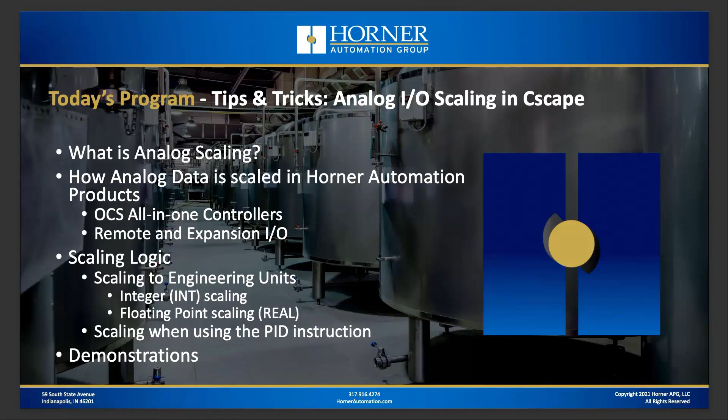Okay, so let's start with what is analog I/O? Well, I think most people understand, maybe new folks are just getting used to the fact that analog I/O are sensors and actuators whose real-world operation is more than just on or off. In other words, they're providing values, data values, typically integers, that are used in either the monitoring of a process or the control of a process, okay?

So an example, for instance, of a digital input might be a temperature or a thermal overload switch. Now that's just going to be on or off based on a thermal overload condition. However, a thermocouple sensor, which is a type of analog sensor, it won't just give you on or off, it'll give you the value of the temperature, for instance.

Another example on the output side, because remember, analog isn't all about inputs, there's also analog outputs. An example of a digital output might be a solenoid valve, which is just on or off, okay? But the analog corollary to a valve might be a proportional valve, all right? An analog proportional valve, where you're not just controlling on or off, but let's say 60% off or 70% off, that sort of thing, okay?

Now, to make analog I/O integrate properly with your control, you need to perform analog scaling. So that's really the conversion of analog to digital data and digital to analog data to and from sensors and actuators and engineering units. So that's really what the program's all about today.

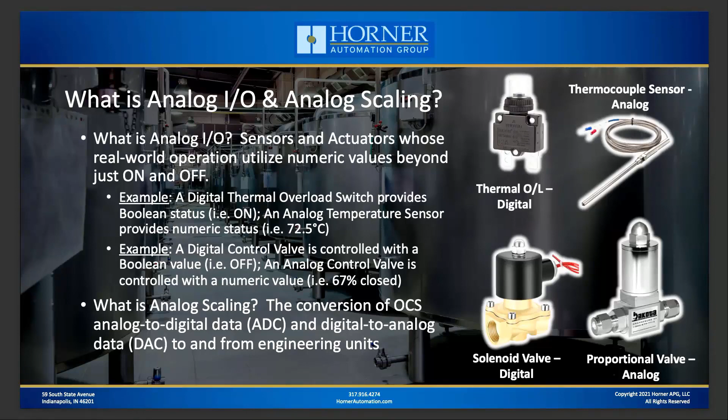Now, from my perspective, there's really three keys to successful analog scaling. First, understand how the sensor converts its measurement to an output signal. What are the engineering units that it's measuring? Are we talking about pressure? Are we talking about temperature, etc.? And then what's the output signal look like? Is it 4 to 20 milliamps? Is it 0 to 10 volts? What does it look like?

Now the third key to success is understanding how to configure and program the controller to interpret that numeric value that was converted from the signal into a measurement in engineering units. So again, the three keys are understand the sensor, understand how that signal from the sensor is converted to an integer value in the I/O module, and then understanding how to program and configure the controller to interpret that signal and convert it to engineering units. So those are really the three keys to success.

And we're going to spend quite a bit of time really on, I think, the last two, all right? Because those are the ways that might be different with a Horner product than what you might be used to with another control product. So we're going to spend a lot of time on the conversion of the signal on the I/O side, and then also on the programming to get you the engineering units that you're looking for, properly scaled, of course.

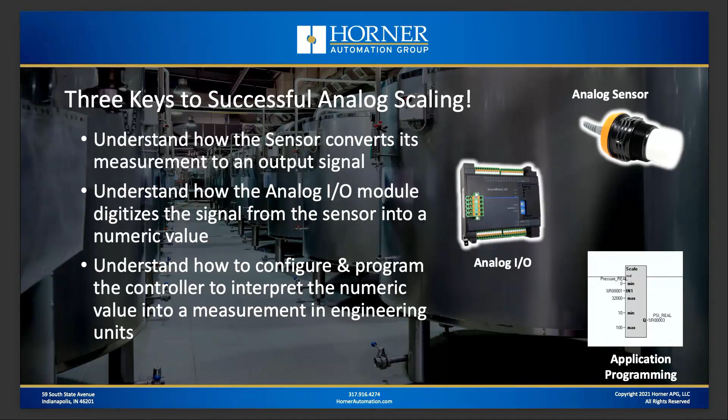Okay, so of course, analog inputs are typically going to be from sensors, and most sensors are going to convert a real-world measurement into a linear electrical signal. Okay, 4 to 20 milliamps is the most common, but you'll also see 0 to 20 milliamps, 0 to 10 volts, 0 to 5 volts, and several others, okay?

Now, what the OCS analog inputs will do, and again, whether this is a separate I/O module or built into the back of an OCS, what that circuitry does is it converts that signal, let's say 4 to 20 milliamps, for instance, into a numeric value, and that numeric value is reported in an AI register. The AI registers are the type of analog input registers which accept analog input values.

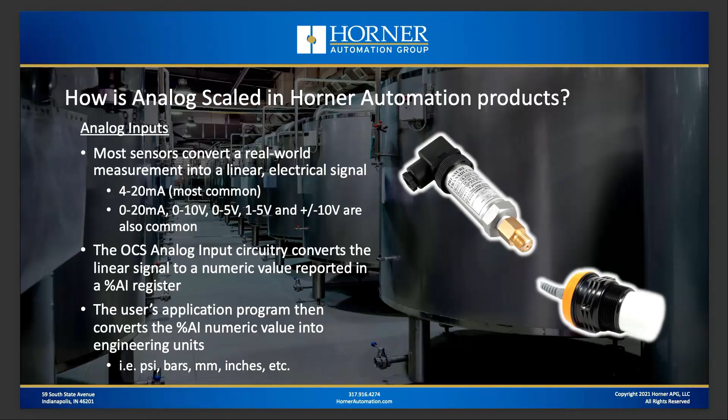And then the last step, of course, in the user's application program, you need to write some logic to convert that analog input numeric value into the engineering units you're looking for, PSI, bars, millimeters, inches, etc. Okay, so that's really what we're talking about, of course.

Now, temperatures are a little bit different. The reason they're a little bit different is because sometimes the circuitry that converts the sensor into temperature is built right into the I/O.

Now, RTD and thermocouple temperature sensors, again, because they're so common, there's two ways you can handle those, okay? First of all, you can connect that sensor to a separate transmitter, which is a separate piece of hardware, which converts that signal from the temperature sensor into a 4 to 20 milliamp signal, for instance, and then that 4 to 20 milliamp signal then gets sent to the OCS as a regular analog signal. So that's one way to handle it.

And then the other way that you can handle it is by utilizing one of the specialized analog input circuits in, say, the Model 5 or the Model 6 OCS, or one of our thermocouple or RTD input modules, where they actually have the circuitry to interface directly with the sensor and convert to temperature. But the value that's converted might need some simple math to get it into degrees Fahrenheit or degrees Celsius, to make it an integer, to make it a floating point value, whatever you're looking for in your application. So again, temperature sensors can be a little bit different.

Now on the analog output side, because remember, we're not only talking about inputs, analog outputs just work in the opposite way. Okay, it starts from the user's application program, where the program determines how the analog actuator needs to operate. For instance, I may want to decide to close the valve 60%. That may be what I want to do in this machine step for machine control.

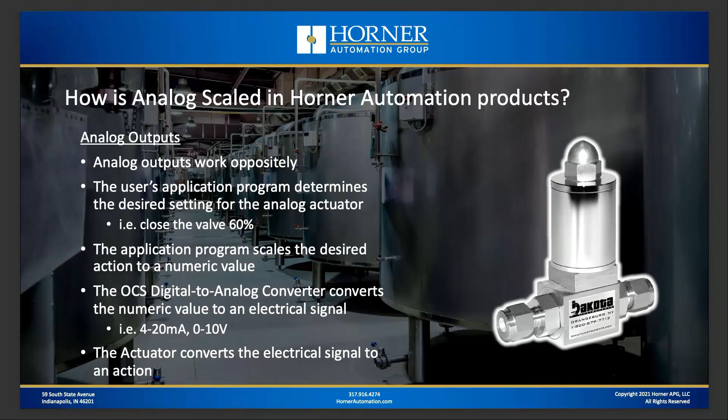All right, now I'm going to show several slides here with a lot of detail on them, and I'm not going to spend a ton of time on these slides. I know a lot of people use these videos kind of to reference after the fact. So when you're in that scenario, of course, you can always scrub right up to the slide you're interested in, pause it there, and soak it in if you want.

But really what we're talking about here is, what does the scaling look like from the analog signal that's generated by the sensor into the analog input value, or the integer value that is present in the %AI register, okay? So most general purpose sensors out there are going to be putting out either 4 to 20 milliamps or 0 to 10 volts. And then on the OCS conversion of 4 to 20 milliamps, for instance, 32,000 counts, or an integer value of 32,000, is going to be full scale. So that's going to be 20 milliamps. 0 is going to be minimum scale, or 4 milliamps.

Now, if it happens to be that your sensor is a little bit under range, in other words, it's putting out a signal below 4 milliamps but above 0, you'll see that in the form of a negative value. Okay, and if your sensor happens to be a little bit over range, it's also possible you'll see a value a little bit bigger than 32,000. And with voltage, it's very much the same. Full scale of 10 volts is 32,000. Minimum of 0 volts is 0 counts. Okay, and you may get a little bit of over range as well. So that's the basics of how, in most cases, analog data is scaled on the input side with the OCS and the OCS I/O.

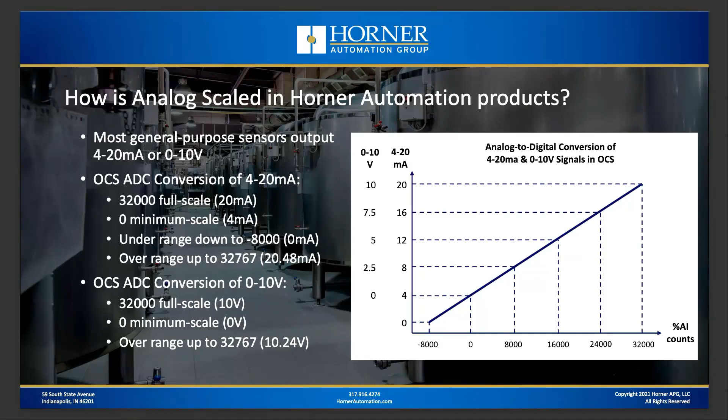Now let's talk a little bit about resolution, because I know some people get confused. They'll say, now wait a minute, this XLE product I have here has 12-bit resolution, while the Model 6, I think, has like 15 or 16-bit resolution. How can the scaling be the same? That doesn't make any sense.

Well, in reality, it is the same, because the only thing that the resolution of the reading affects is how many numbers increment or decrement as the signal changes. For example, if you're using an analog input from Horner that has 16-bit resolution, the minimum change is 1 count. So as that signal is very slowly incrementing, you can potentially watch that analog value in the AI register incrementing all the way up 1 at a time.

However, if you're dealing with a Horner product with 12-bit resolution, it's still going to be creeping up from 0 to 32,000, but it's going to be creeping up 8 counts at a time, because the minimum resolution from a counts standpoint is 8 counts. Okay, so your scaling is always 0 to 32,000. It's just that the steps that you take between 0 and 32,000 will change based on your resolution.

And I will make one caveat here that we'll point out again in the program, and that is that SmartRail actually is the only Horner product we have that isn't scaled 0 to 32,000. It's scaled 0 to 4,000. So that is an outlier there.

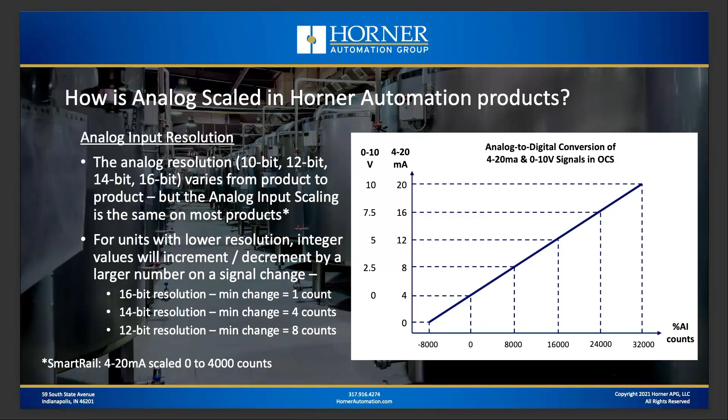Okay, here's a chart. Again, I'm not going to spend a lot of time on this, but it basically shows you the scaling and the resolution of some popular Horner automation products, from the Micro OCS, which is our most cost-effective product line in that first column there, followed by a couple of our most popular XL Series I/O options, the Model 3 and the Model 6, followed again by the SmartRail and the SmartBlock. And the SmartBlock is really our premium analog product.

So if you have an application which requires really the highest resolution and the highest isolation and those sorts of things from an analog perspective, the SmartBlock is really our premium product. Now, that being said, we have excellent analog throughout our range, and your requirements may very well be met even by the Micro OCS product, for instance.

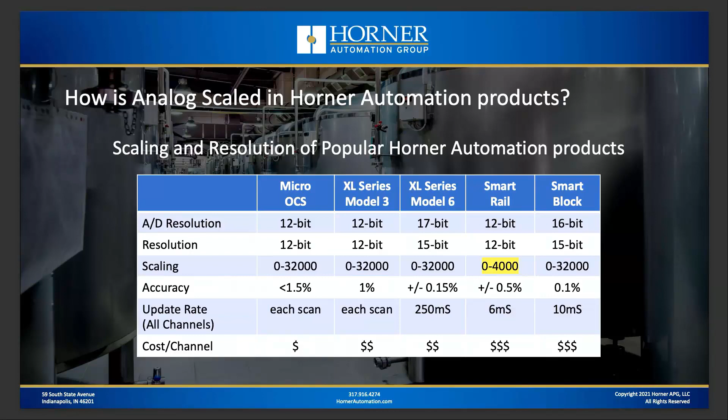Okay, now let's take a look at an example. Let's say we have a pressure sensor that's connected into one of our OCS products. And let's say the pressure sensor is monitoring pressure in a range of 0 to 10 bars with a resolution of 0.01 bars. Sometimes with an analog sensor, you'll get a resolution specification, other times you won't. It just depends on the sensor.

And then the output of that sensor, again, the input is in pressure or bars, the output is 4 to 20 milliamps. Now, from an OCS conversion standpoint, as we've already covered, 32,000 counts is going to be 20 milliamps or 10 bars. 4 milliamps is going to be 0 counts or 0 bars. And then you can see a linearization equation there on the screen. How would we convert from counts to bars? Although I'll show you an easier way to do it when we get to the programming side of things.

And then if we go through the math with a sample reading of 13,520, we do the math and we see that the end result is 4.23 bars. Okay, so that's an example of getting from a pressure sensor into a pressure reading inside your application program.

The second example is the same case, but this time with SmartRail. So really the only difference is that instead of 32,000 counts being full scale, it's going to be 4,000 counts being full scale. Everything else is the same. Of course, our linearization equation is slightly different because our full scale is different.

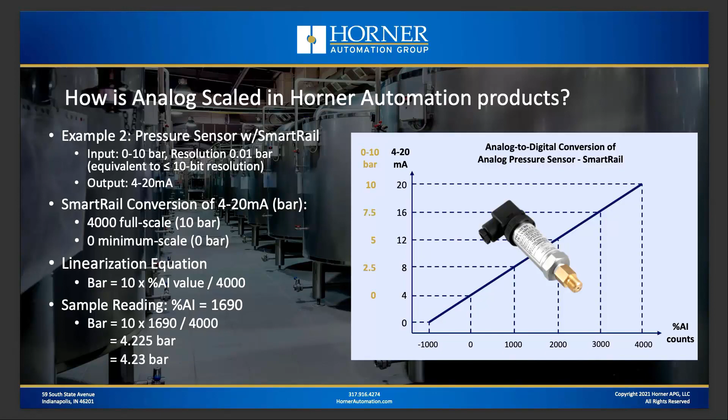But the end result, if we have the same pressure reading on the pressure sensor, the end result is the same. So if we have 4.23 bars being read by the analog sensor, we're going to end up with 4.23 bars in the application program. So again, regardless of the scaling value or the max value, you're going to end up in the same place from an engineering unit standpoint.

All right, now let's take a look at an ultrasonic level sensor. A little different scenario. Now we're not looking at pressure, we're looking at an ultrasonic level sensor, which has a range of 1 to 25 feet. So pretty long distances, relatively speaking, for ultrasonics. 32,000 counts is going to correlate to high range, which is 25 feet. 0 counts is going to correlate to low range, which is 1 foot. Our equation is similar but slightly different, as you can see there.

If we have a sample reading of 7228 in our AI register, where do we end up? Well, we end up at 6.42 feet. And if we're interested in inches instead, we can be looking at 77.1. So again, these are just different examples of scaling that's done on sensors with different ranges into OCSs and OCS I/O modules.

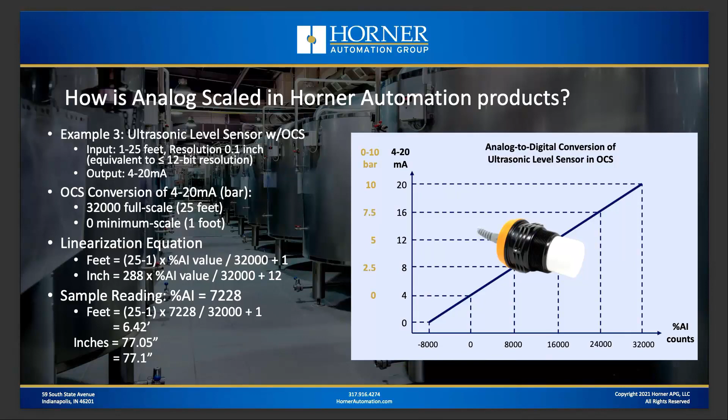Okay, now let's look at one the other direction. Now we're talking about a proportional valve, where the input to the valve is the signal. So the input to the valve is the signal, 4 to 20 milliamps in this case. The output of the valve is the position of the valve from 0 to 100% open, for instance. So let's say that with this particular valve, and it could vary by valve, the 0 counts is 0% open and 32,000 counts is 100% open.

And it could be the opposite. It could be 0% closed and 100% closed. It all depends on the valve. You'd want to check your documentation for your valve to be sure. But in this scenario I've outlined here, we've got a pretty straightforward linearization equation.

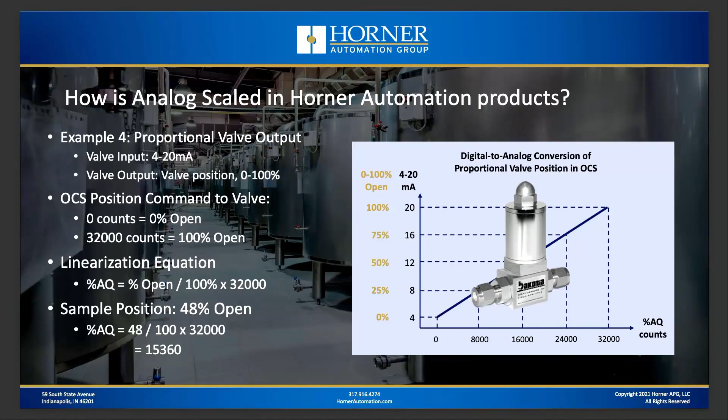And if we want to move the valve to 48% open, we can do the quick math and we can see that we need to set our AQ register. Remember, AIs are where analog inputs come in. AQs are where analog outputs go out. So our AQ register would need to have a value of 15,360 in my example here, if we want that valve to be 48% open.

Okay, we're going to talk about temperature sensors now because they're a little bit different. And this is an area I do see customers get tripped up a little bit, because we're doing the actual temperature conversion in the OCS most of the time. And when we are, the units that we provide, even though they're already converted to temperature, may not be in the exact units that customers are looking for, whole degrees or tenth degrees Fahrenheit or Celsius.

Now, remember, there's still two approaches we can take. If you've got an OCS that only has 4 to 20 milliamp or 0 to 10 volt inputs, for instance, you could use an external temperature transmitter that's going to do the temperature translation for you and output that linear signal. But if you want to connect those sensors directly into one of the Horner OCS's temperature type inputs, thermocouple or RTD, we also actually do more than that. We also do thermistor as well on some products.

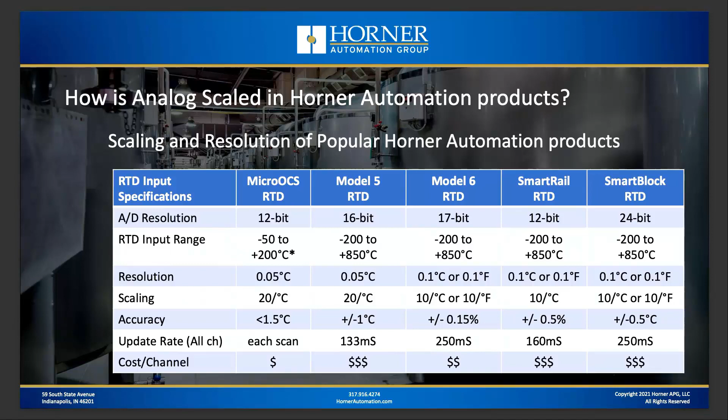So you can see some differences there in terms of the resolution, how the temperature is scaled, what the accuracies are, how frequently the channels are updated, all those sorts of things. I'm not going to go through those in great detail, but I want to show you there is a great variation there. All the way over to the right, the A to D converter used on the Smart Block is quite high in resolution, even though at the end of the day, you're still looking at tenth degree C or tenth degree F in terms of your actual readings.

Okay, that last chart was all about RTDs. This chart is about thermocouples. Thermocouples are just slightly different variations of temperature sensors. They work completely differently, but they are often used in industry, just like RTDs are, and they're not supported directly in the micro OCS line. So if you're using a thermocouple with a micro OCS application, you will need to use an external temperature transmitter to convert over to 4 to 20 milliamps and linearize externally. But again, lots of variation in terms of the specifications for thermocouples in the Horner OCS product line, and the I/O that's accepted as well.

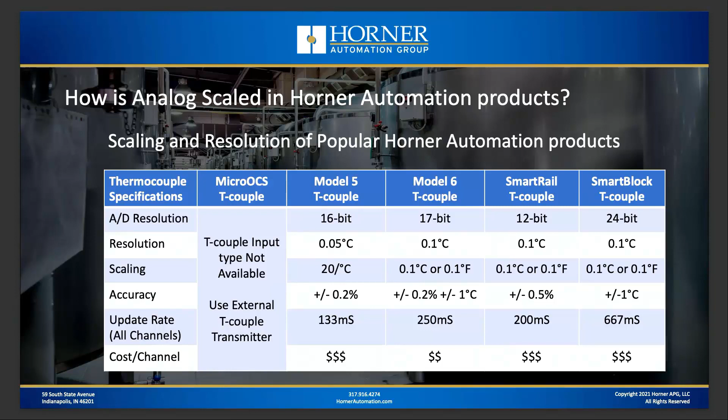Now let's do a quick example of an RTD input connected directly to, let's say, the XL Series Model 6 I/O. That's one of our most popular XL Series I/O options because it has 6 analog inputs and 4 analog outputs, and each of the 6 analog inputs can be configured for thermocouple, RTD, 4 to 20 milliamps, 0 to 10 volt, and even more. So really flexible on the input side of things there.

Okay, so let's say we have a PT100 sensor, platinum 100 ohm sensor, connected into a Model 6 or maybe into the Smart Rail. One AI count, in the case of the temperature readings, is going to correlate to either a tenth of a degree Celsius or a tenth of a degree Fahrenheit, depending on how it's configured in the OCS, or in Cscape, because in Cscape you can configure for these products, for Model 6 and for Smart Rail, whether you want your result to be in degrees Celsius or degrees Fahrenheit. And they're going to be reported in tenth degree increments.

Okay, so if you select degrees Celsius, and let's say you have a value of 100, that means 10.0 degrees Celsius. And if you want to take that exact value and convert it to degrees Fahrenheit, you'll need to do the math in your OCS, which can easily be done. So there you can see the conversion equations.

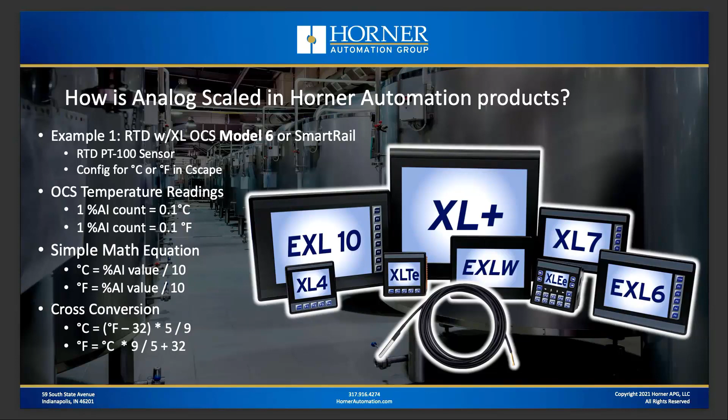Now, similarly, let's talk about a thermocouple connected to the XL Series OCS Model 5. The Model 5 I/O has 2 configurable analog inputs and 2 configurable analog outputs. And on the input side, those again are configurable between RTD, thermocouple, 4 to 20 milliamps, 0 to 10 volts, etc. So in this case, let's say we've got a thermocouple type K sensor, and we're going to configure it for 1/20th of a degree Celsius in the Cscape configuration process.

With the Model 5, you don't have the choice between degrees Celsius or degrees Fahrenheit. It's going to come in 20th degree C increments. That's how the value is going to be coming in. It's already going to be scaled to temperature, but it's scaled to degree C, in 20th degree C increments. So if you want to convert that to degree C, you need to divide the value by 20. And then you can cross-convert it over to degrees F through the standard equation that you see there.

So let's say we have a sample reading in our AI register in this example of 2030. What does that mean? Well, we divide that by 20. It means we're at 101.5 degrees C. When we do the standard C to F conversion in math in the OCS, we end up with 214.7 F. So again, more examples of how to do the scaling, this time with temperature.

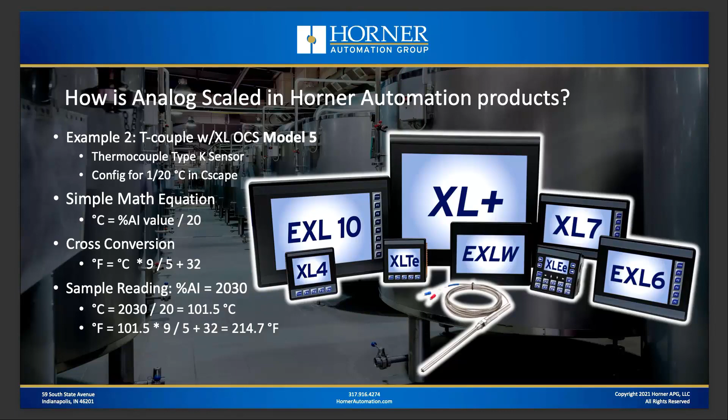This is an important one because this is one that does trip folks up, especially since Micro OCS users often tend to be newer users. Of course, there's plenty of experienced application engineers using the Micro OCS, but because of its price and its capability, there's also plenty of newer folks out there as well. And the way that the RTDs are scaled with the Micro OCS is fixed at 20th degree C increments. So it's very similar to the Model 5.

And remember, its range is limited to minus 50C to plus 200C, which correlates to digital readings between, that's incorrect there, minus 1,000 and plus 4,000 counts. Okay, so that's the scaling. Minus 50C to plus 200C correlates to minus 1,000 to plus 4,000 counts. You've got a simple math equation to get you to degree C. You have a simple cross conversion to get you to degrees F.

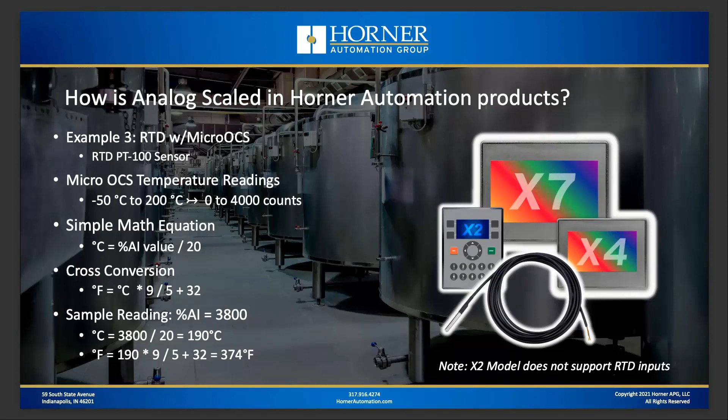And there you can see an example with a reading of 3,800. It means that you're nearly at full scale. You're at 190C or 374F. Okay, so another example of scaling temperature in the OCS.

Okay, so we've covered in a pretty good amount of detail how you're going to take analog sensor data that's being output, let's say, as a 4 to 20 milliamp signal, or a thermocouple signal that's directly connected to an OCS, and being converted. What does the conversion look like? Next, we're going to talk about the programming required to make that happen and to make that happen really easy.

Because the final step in those 3 keys to success is doing the programming in the OCS in Cscape to get the engineering units that you're looking for. And by far, the easiest way to do this is using the scale function.

And quite a few people, I guess, miss the scale function. I think a lot of people, once they see it, are thrilled that it's there and they use the heck out of it. But some people miss it, and we don't want you to be missing that instruction. So there's 2 ways you can use the scale function to scale analog inputs in your logic.

First of all, you can use the scale function in integer mode. Okay, if you're using integer mode, it's going to round off the result. However, you can very often use some tricks, and I'll show you those tricks, to add some implied decimal points, which can work really well, so that you can stay in the integer form for your data. In many, many cases, you can stay in the integer form, and your end result still has plenty of resolution and gives you great results.

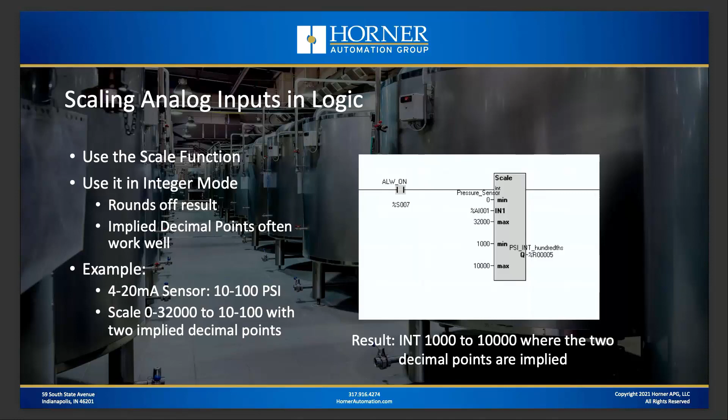If instead of 10 to 100, we scale between 1,000 and 10,000, now there's a couple extra zeros there, and we're actually getting resolution all the way down to 100th of a psi, even though there's no decimal point anywhere to be found. Okay, so that's a trick that you can use. If you just want to stay within the digital form and not mess with floating point, that's something you can do. Now, for many of you, you'd prefer to do it in floating point or real mode.

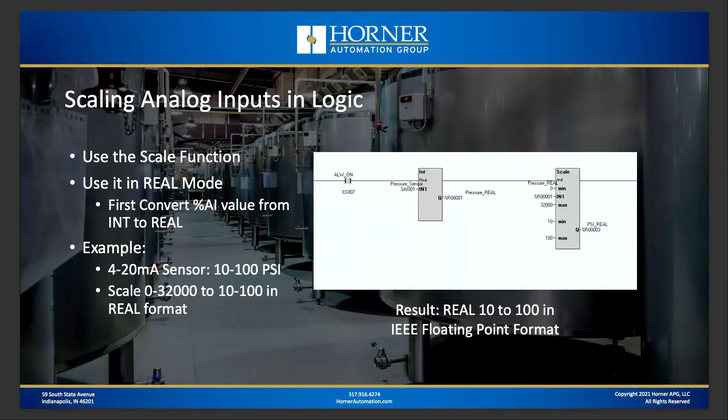So with this same example, the difference would be that first, you would need to take the analog input value in your AI register, and you need to convert that integer into a real value into another variable. And then that variable that's been converted to real would go into the scale function. And then your end result is a floating point value between 10 and 100, where you aren't rounding off all the fractional parts behind the decimal point. Okay, so that's the other approach you can take. It does require an extra step to convert your analog input from integer to real. Okay, so each approach is equally valid.

All right, let's not forget about scaling analog outputs in logic either, though. And this process is just the opposite. Okay, so we start with the real value for our output command. You know, we want to move that valve 62.5% or whatever the case may be. So we want to scale between, let's say, 0 and 100% on the valve position to 0 to 32,000. That's going to end up in the analog output register eventually.

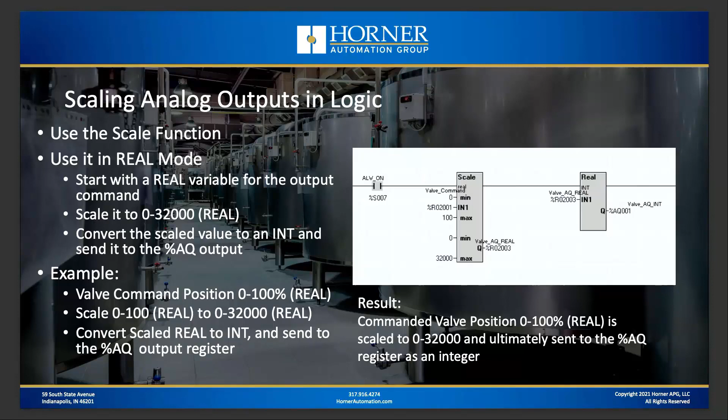But we do our scale function in the real form. And then when we're done, we take that real value result and we convert it to an integer and then send it out to our AQ register so that the OCS IO point will convert it to the analog signal, which allows the valve to move to the position we desire. Okay, so analog outputs utilize the same function, just the inputs and outputs, if you think of it that way, are kind of reversed. Now, here's a tip.

One thing that can happen occasionally with the PID instruction. Again, PID is an instruction that's available in the Horner OCS. It's available, of course, in PLCs and many other powerful control products. That basically is a special mathematical algorithm that allows you to control a process value quite accurately in a lot of cases.

Now, one thing that's involved in a PID instruction is it requires what's called a process value. That's going to be what it's measuring to detect if the process is being controlled appropriately. So if you're doing temperature control and you're going to try and keep an oven at 405 degrees, you're going to need a temperature reading so you can see, well, is the temperature where I want it to be, or do I need to adjust the oven controls to heat up or cool down the oven to get where I want to get to?

So the process variable is what we're talking about here, okay? Now, sometimes you can end up in a case where a process variable has a very small range. So a full range would be 0 to 32,000 counts, right? A full integer range, pretty close to full, would be 0 to 32,000 counts. But maybe you have a process where that process variable is not changing very much.

So if that's the case, what you really want to do is scale that process variable up to cover much more of the 0 to 32,000 range before you bring it into the PID instruction. Now, why would you want to do that? Well, without going into all the details, effectively you're providing the instruction with more bandwidth for its calculation so it can have more digits of resolution in order to make its calculation. That's kind of a simplified explanation. But effectively, you'll get better results if the input range of your process variable is not too narrow.

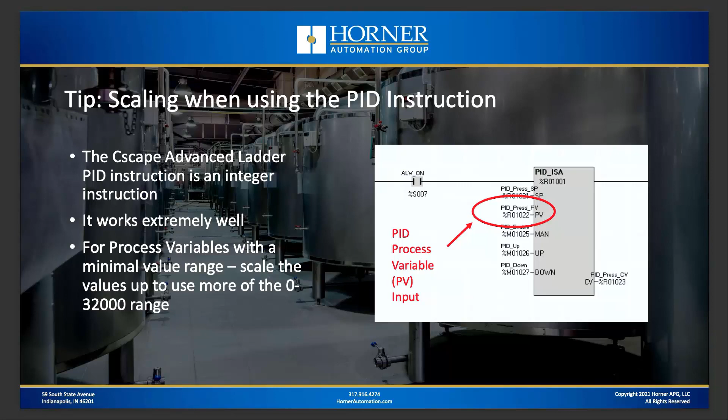On this next slide, we're showing an example where the process variable is originating from a pressure sensor from 0 to 10 bar. But in this application, we're only going to see somewhere between 4 and 6 bar. We're never going to see outside of that range. So that would be a range of 12,800 to 19,200 counts, if you do the math. Well, that's a relatively narrow range. Not bad, but relatively narrow.

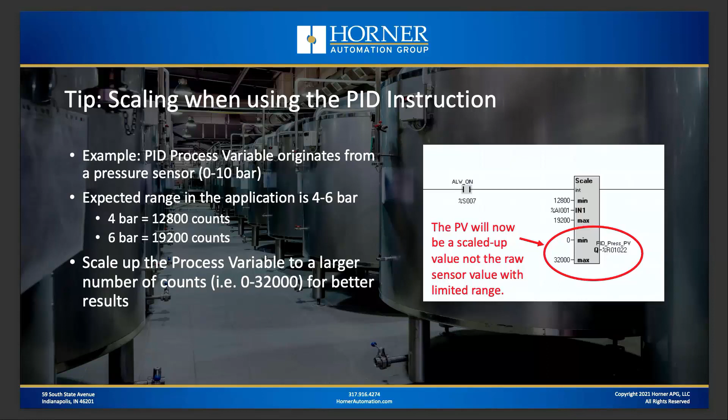So what you could do is use a scale block to scale up 12,800 to 19,200 on the input side to 0 to 32,000 on the output side, and then you could run that value into your PID instruction, and now that value has a much larger range, which gives your PID instruction more bandwidth. Okay? So that's enough of that material. Let's start taking a look at how we would do this in an OCS controller.

So I'm going to go ahead and start with a quick look at our OCS in the overhead view here. I've got my trusty XL7, and I've got my trusty I/O simulator connected. We're simulating two different analog input sensors, both of which have a 4 to 20 milliamp output. The first sensor is an ultrasonic sensor measuring from 1 to 25 feet. So minimum is 1 foot, maximum is 25 feet. The other is a pressure sensor, which is providing pressure not just in the positive direction, but between minus 100 and plus 100 pounds per square inch.

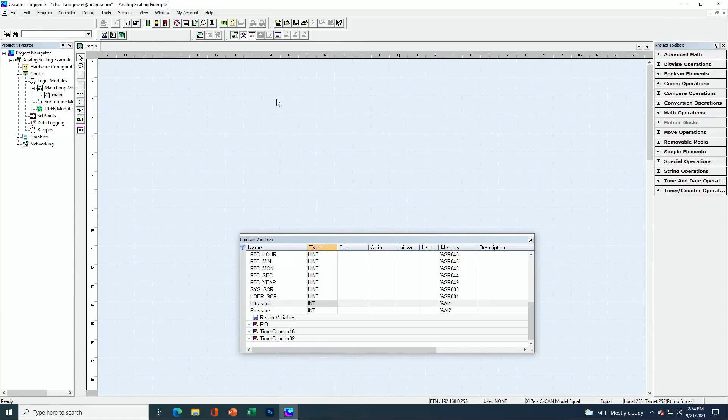At this stage, I'm just showing the raw counts for these particular signals coming into the OCS. So let's go ahead and do some logic to turn these raw counts into the actual engineering units. To do that, we're going to go to Cscape. For the most part, I'm starting from scratch here, though I did get the basics of that one screen set up. So I'm going to create a new rung. I'll drop an always on contact here, and then I'll right click on the power bar and say new rung.

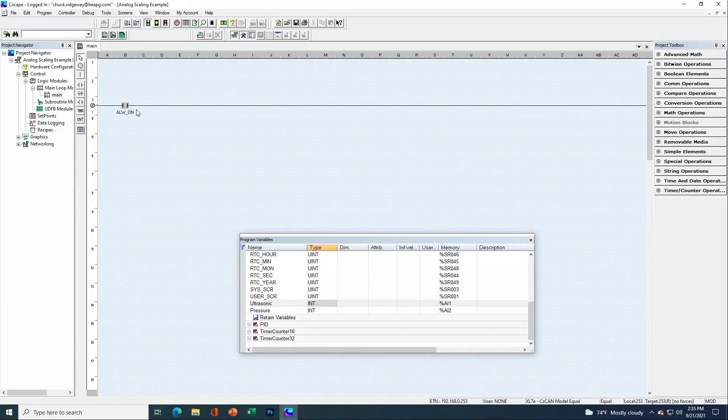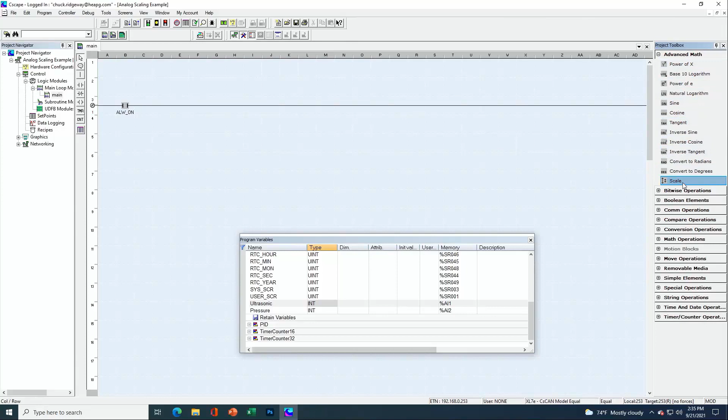For this ultrasonic sensor, let's just stay in the integer form. Let's not convert to floating point. Let's just do it all in integer, and I'll show you where that can actually work out pretty well. So in that scenario, I can jump right into my scale block. And remember, the scale block is the one we want to use if at all possible. It's located under the advanced math here. So I can select scale and drop it on my screen here.

So what's the input of my scale block? Well, the input is going to be the converted signal coming from the sensor into analog input number 1, or %AI1. And I've created down here a variable called ultrasonic, which is an integer-based variable, and it is mapped to %AI1. I'm in variable-based advanced ladder here, so I have the ability, using the program variable table, to map certain variables where I need to.

And in this case, I want to map this variable called ultrasonic directly to %AI1. And then while we're here, I'll show you the fact that I've also directly mapped another variable called pressure into AI2. That's going to be my -100 to +100 pressure sensor that we'll get to in a minute. But let's go ahead and start by scaling, staying in integer form, not floating point form.

Let's start with scaling this ultrasonic sensor. Okay, so our input is going to be the variable called ultrasonic, and that is mapped directly to %AI1. The minimum range coming into that value, at 4 milliamps, we're going to be looking at 0. At 20 milliamps, we're going to be looking at 32,000. Now, what's my output going to be? Well, I need to create a new output variable that is scaled to my engineering units. And my engineering units are going to be in feet, so anywhere between 1 and 25 feet.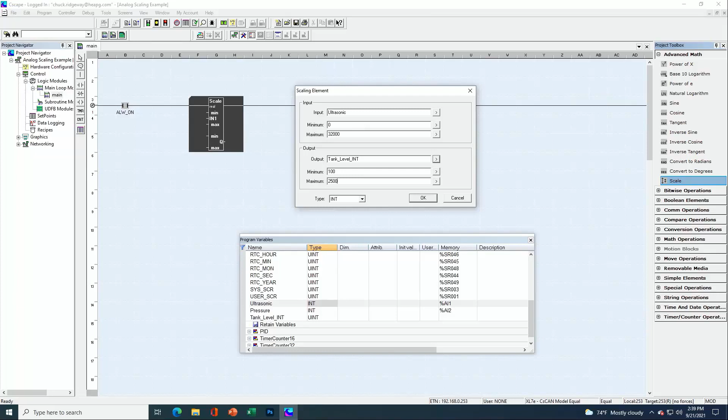So what I can do, as long as I keep the values below 32,000, because anytime you're doing an integer calculation, you want to keep all the values involved in the calculation at 32,767 or smaller. But in this case, if I just add a couple zeros on my input side and my output side, now I'm going to be scaling 0 to 32,000 coming in to 100 to 2,500. So effectively, now I have a resolution of 1/100th of a foot. That's not bad. I can live with that for sure. So I'll say OK here.

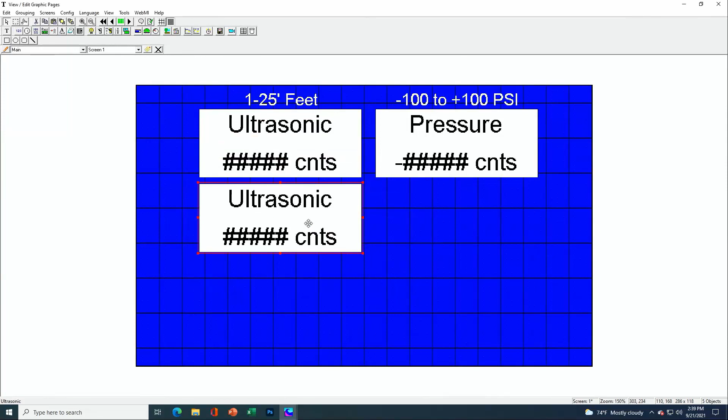For the first time showing you guys, I'm going to go into my user interface here. I copied this data object, and I'm going to modify this. Now I still need this in the decimal form, okay? But now my variable is different. Now I'm interested in tank level int. That's the variable I created. And when I display this, it's no longer in counts, but it's in feet. And I can show a decimal point on the screen, even though technically it's just an integer value. Okay, I think that's the way I want it.

So now when I display this, I should be seeing not just counts, but I should also be seeing right here the ultrasonic reading all the way down to 1/100th of a foot. So that's how I did scaling in this case without even leaving the integer form. Okay, now let's work on our pressure translation, but this time let's do it in floating point. We could do it in integer as well, but let's do it in floating point for illustration purposes.

Okay, so I'm going to create another rung. Again, at Horner, you can't directly connect a function block to the power rail, so you always have to have at least one contact, and that makes the always-on contact very popular.

Now before I can do my scaling block here for floating point, I need to take that analog input coming in, that variable that's currently an integer, and convert it to a real value, because anytime you do real math, and a scale block is a math block, you have to have all the operands in the same form. So I need to use a conversion operation from integer to real. I'll drop that on the screen.

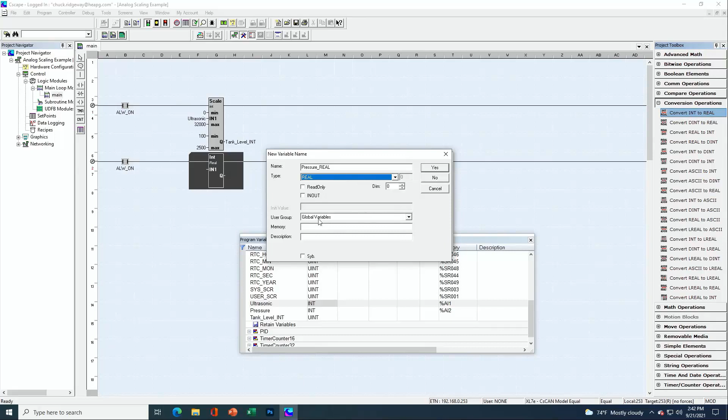The integer input for my conversion here is my pressure sensor that's mapped to %AI2. I had already created that. Now here is where I need to create a new real variable, and let's call this pressure real. I'll hit the button here because I need to create this on the fly; I haven't actually created it yet. I need to make sure that it's in the real format. Everything else here is fine. I can say yes and okay.

And so now I've taken the pressure reading coming in from my analog input and converted it to another variable that happens to be real. Now I can go ahead and grab my scale block. Again, make sure that it's the right form, and I do want real this time. So the input of this block is going to be my pressure real variable that I just created.

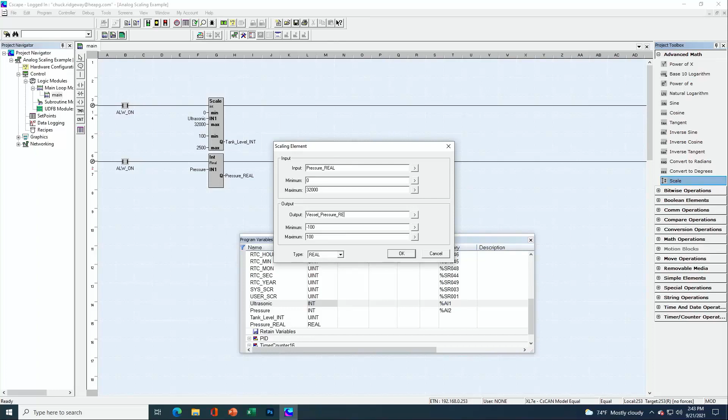Now, it's coming in again, 0 to 32,000 counts, and it's going to go out -100 to +100. However, I still need to create a new variable that is the scaled version, and this time let's call it vessel pressure real. Oh, I forgot to finish the process of creating it, but Cscape reminded me, so no big deal. It's real, what I'm looking for. Say yes. All right, so that's the only logic that's required here as well.

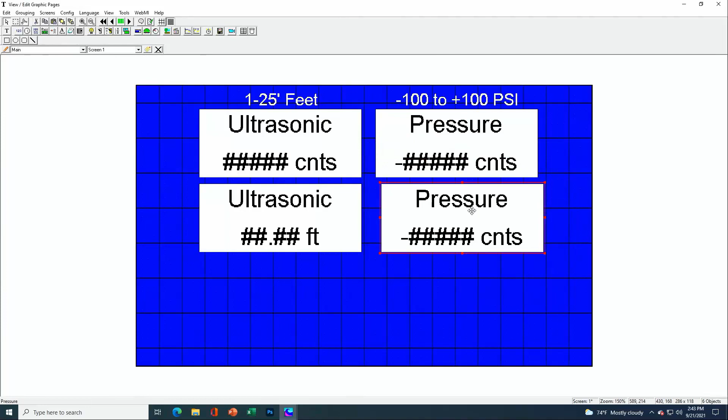Let's go back to our screen and finish this up as well. I'll copy this, paste it. Just makes it easier, so I don't have to create it from scratch every time. Let's get it more or less lined up. Let's switch first to a 32-bit value. Next, let's switch to floating point format. And then finally, let's select our variable, which is vessel pressure real.

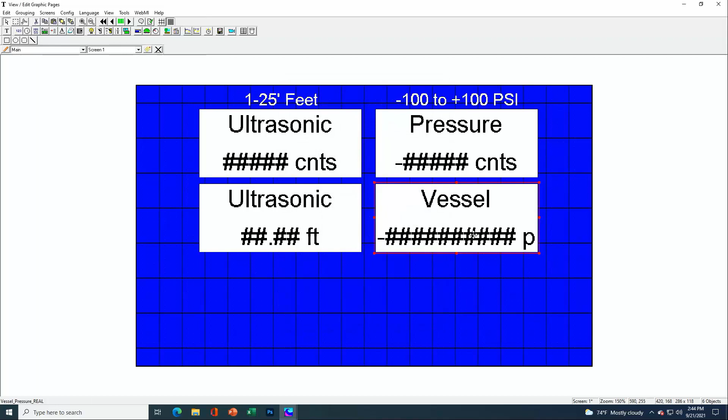Again, we're not in counts. This time we are in PSI. And our legend could still say pressure, but I'm going to change it to say vessel. Why not? Okay, okay, and okay. Oops, I didn't get my data display right. This is -100 to +100, so I need to get that data display proper. So let's say we want to display 3 on the left and 2 on the right. So let's go ahead and pick that one.

Now I believe we're ready to download. Hopefully I didn't make any mistakes here. So Cscape's figuring out what changes I've made, getting those changes ready for download, and then it will start the download process. Let's go back to our OCS, and we can watch the program finish downloading. Just another few seconds here, and we should be in good shape. All right, there we are.

So let's start with the ultrasonic sensor. I'm at 360 counts, so we're almost to 0, but not quite. As I increase that value, you can see as our counts go from 0 on up, our distance is incrementing right along with it, to the point that if I continue all the way up to maximum, we're going to see a maximum of 25 feet at 32,000 counts.

And similarly with my pressure, I'm looking at a low pressure, and that's scaled -100 to +100. So we're near 0, but not quite there. As I increment up, we get what we want, finally going into a positive pressure as we're approximately mid-range. And if we go all the way up to the top, we can see that we're at full range and at the value we're looking for.

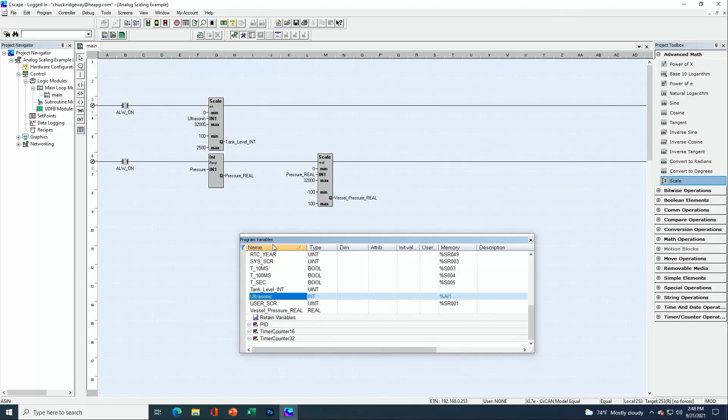Now, that being said, if you press this name column here, it will alphabetize them for you. So you can get them into alphabetical order, but you have to actually press this button here on the header. But yes, Peter, we do plan on making a configuration option so you can choose your preference for the order in which the variables are displayed in the variable table. So hopefully that answered that question. I'll bring Casey back in here. Okay.

Sure, it looks like he was specifically referring to when you're selecting a variable inside of a function. So when you hit the drop down after you're actually selecting one inside the function block. So he was talking about the variable browser, right? Yeah, same thing. Yes, absolutely. We have a feature request that's been submitted and approved that will give you the ability to select whether you want those in alphabetical order or in the order in which they were created. But it's not in there yet. Very good. Anything else? All right. I think that's it.

All right, very good. So hopefully you'll find that analog scaling, especially when you take advantage of the scaling block, is pretty straightforward. Just remember the 3 keys to success. Study your sensor, understand how it scales the signal that it's sending out for an analog input, for instance. Understand how the OCS or controller is going to be converting that value into an integer value, and then use the scaling block to scale it into engineering units. Okay, thanks, Casey.